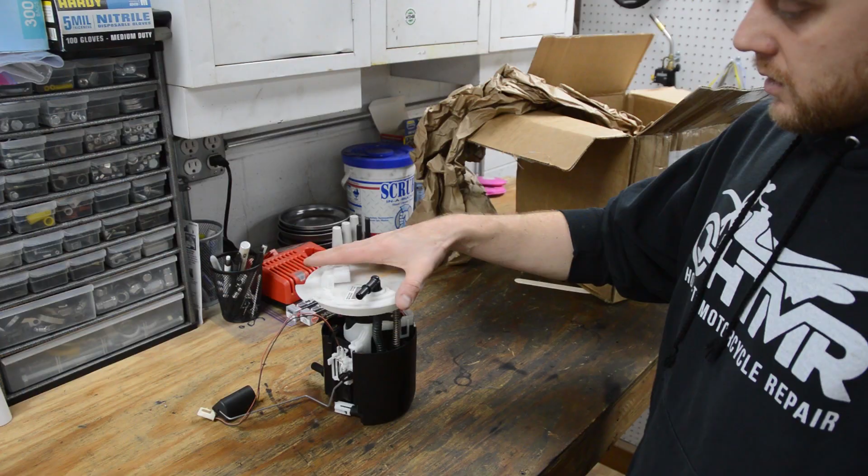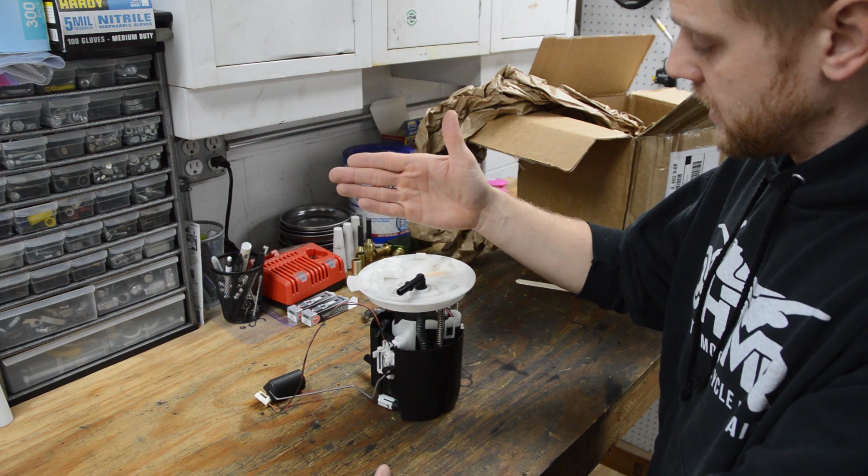Okay, so what I've done is I went to car-part.com. That's car-part. Okay, and on that website a bunch of salvage yards list the parts that they have for sale. So I looked up 2009 and up Cadillac CTS-V with the 6.2 liter and looked under fuel pump, and there was a bunch of salvage yards that were selling these units.

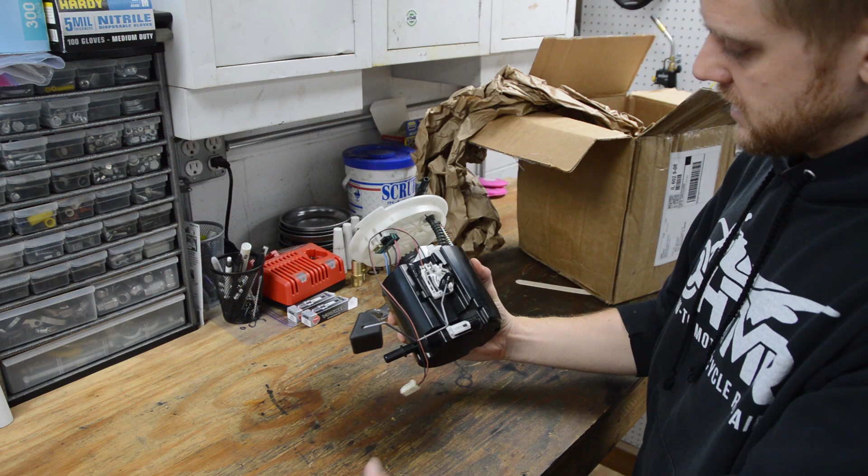I picked this up for $250. It looks like it's in really good shape. This thing isn't cracked or anything. I guess this is a common failure point here. But what this is, there's two pumps in here.

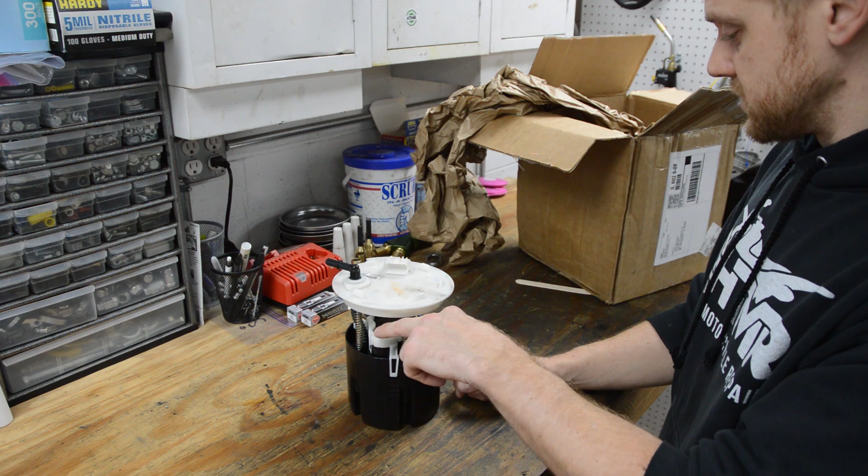Okay, so what I'm going to do is upgrade these pumps. I think VaporWorx is going to do that for me. So install two brand new higher flow pumps and run their PWM controller and all that. So I'm going to ship this off to him, and he's going to rebuild it. Okay, and then we'll have tons of fuel.

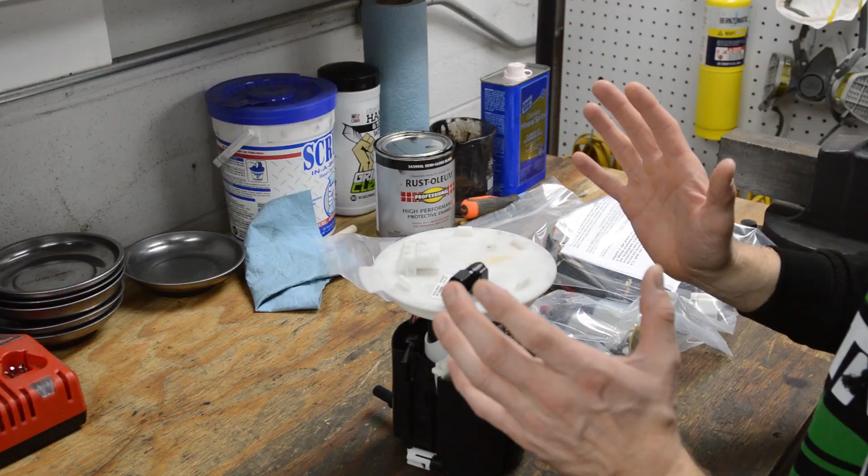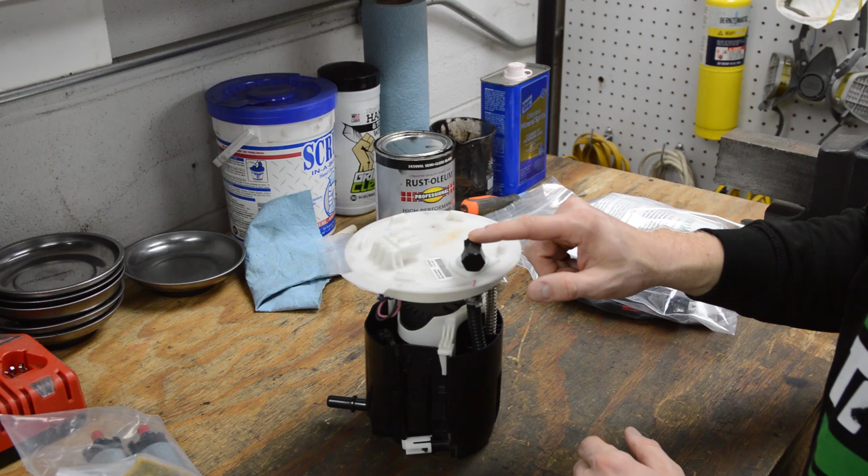So what he did is he took this all apart and upgraded the pumps to the AEM 340 liters per hour pumps. Okay, so these are the old pumps. Changed out the filter. And then also these come stock with a plastic fitting here, which are known to break and leak. So what I had him do is upgrade that to an aluminum bulkhead. So he mills some stuff and whatnot, and this is all aluminum, so it won't crack.

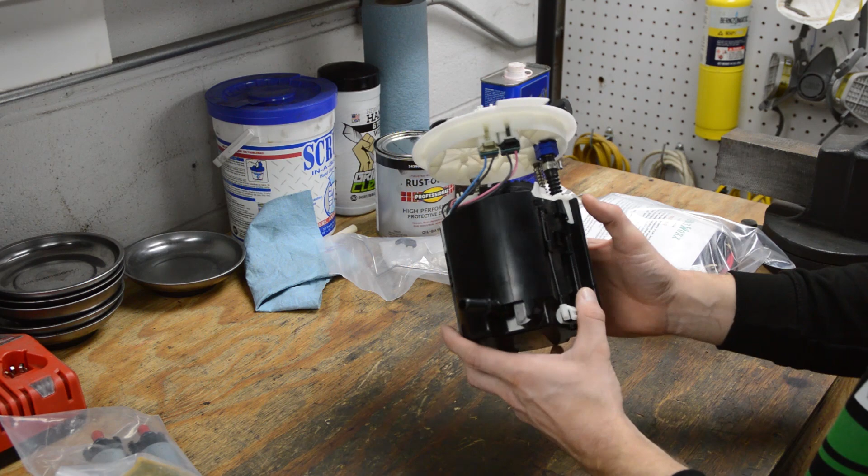And he flow tested it. Okay, so this has upgraded pumps, new filters. It works. This guy is gonna flow a lot of fuel. Okay, and then it still has the hookup for the corner pickups. And also, I removed the float level sensor because I have a different 0 to 90 style.

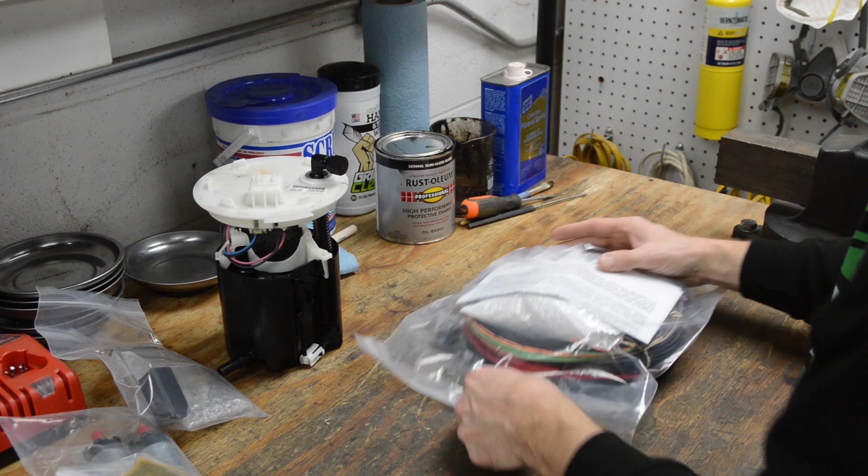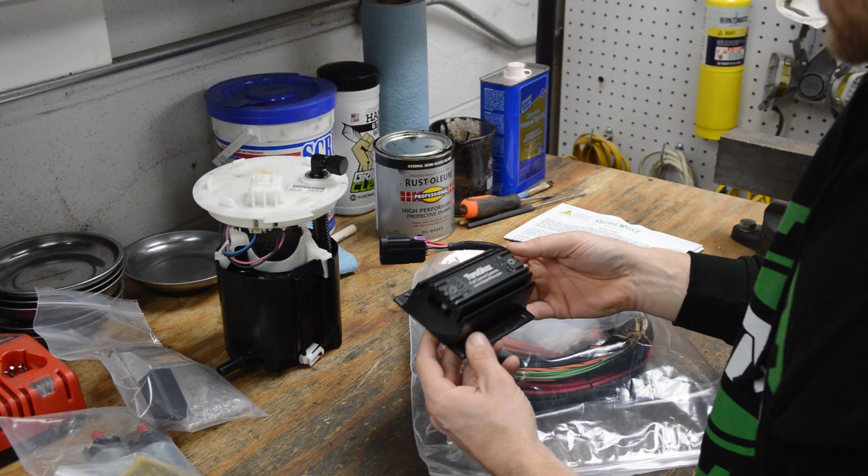Okay, over here is the VaporWorx kit. Let's open this up. Got some instructions to read through. Alright, so let's open this guy up. Alright, so this is the PWM controller. Okay, it's the heavy duty case. And here's all the connections that we need to make. But yeah, this is what's going to control this guy.

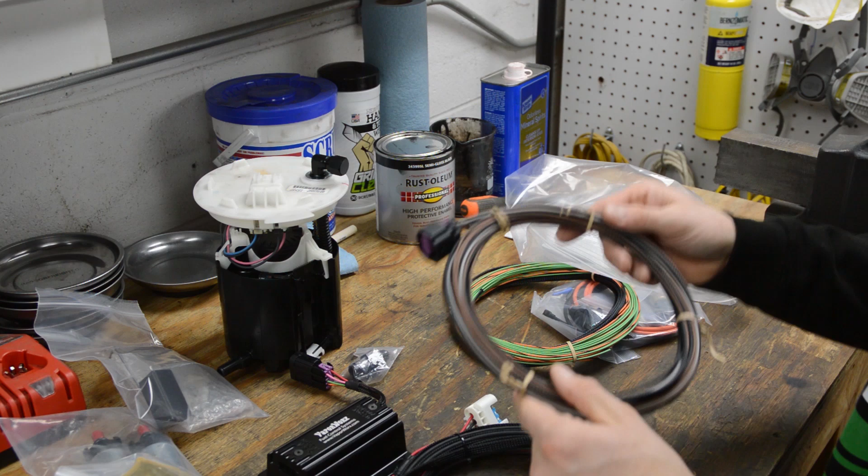Okay, this is a fitting for here. Okay, so this is all the wiring that's needed for this kit. This plugs into, good deal. So we'll go through all this wiring. And this is pretty much everything I need.

Okay, real quick story about how I learned about VaporWorx. I actually met the owner, Carl, back in 2006. I was living in California at the time, and it turns out my boss at the place I worked at went to high school with Carl. And this was right when I acquired my Chevelle. You know, I bought it when I was out there in California. And he's like, hey, Carl is really into cars, and he's got a '69 Camaro, I believe, or is it '67, '68? I don't know.

I will put some pictures. Anyway, he's like, yeah, let's go over there and we'll just talk or whatever. So I met him and we talked cars and whatnot. And here we are 15 years later, and I still keep in contact with him every few years when I have questions on my project. And, you know, I've been wanting to do this build for like 10 years.

So anyway, here it goes. Let me do some doodling and we'll talk about how this VaporWorx system works.

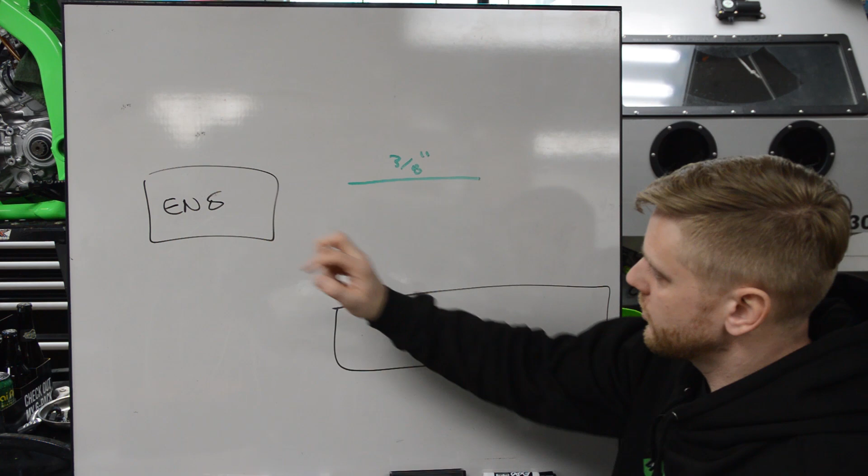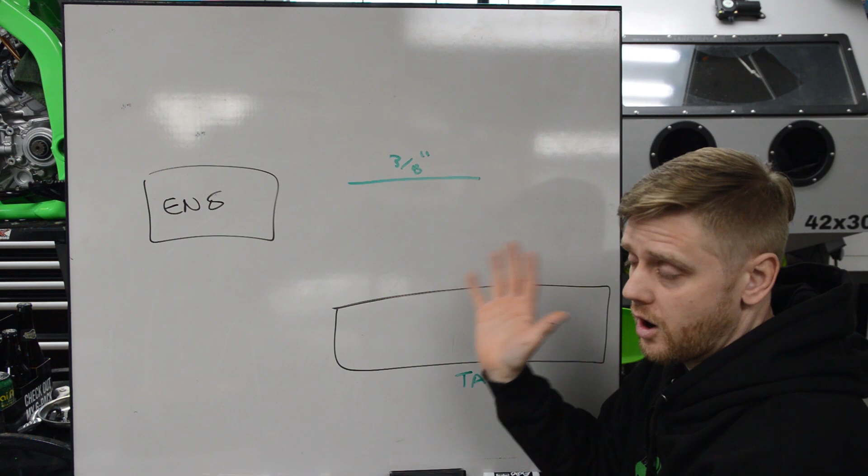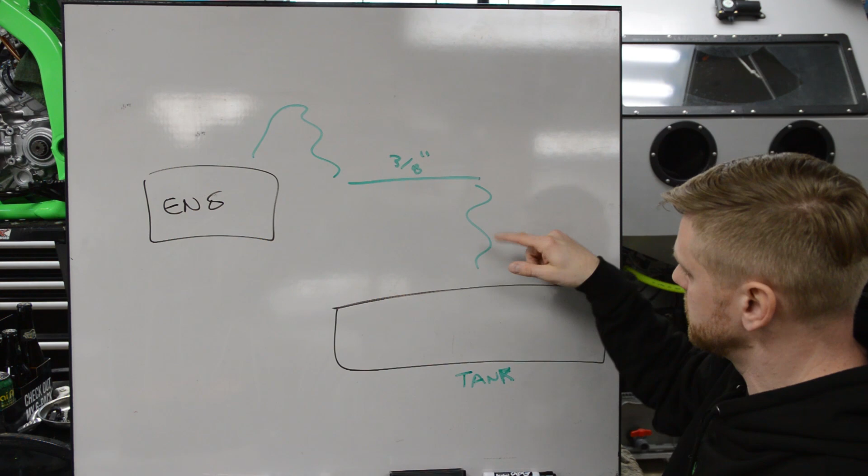Okay, real quick, let me discuss a few things. So we have the tank, we have the engine, and I have a 3/8 hard line, which is stock, 3/8 OD stock line in my frame rail from this car, and that's what I'm going to use. So all I'm going to do is some whips, okay? There are compression fittings that convert tube to AN, so I'm going to do -6 whips. So that takes care of that.

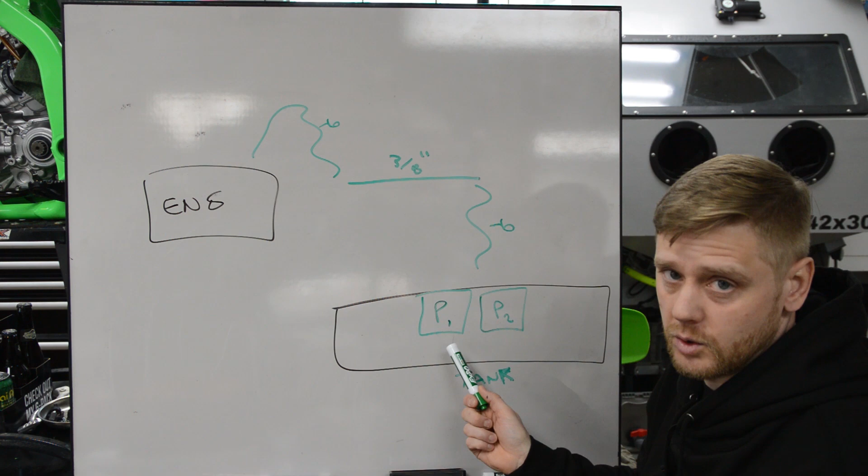That's pretty easy. Now, what most people do is they'll run a huge pump, maybe even 2 pumps, and then the second pump will be activated under boost with a pressure switch, just a Hobbs switch. You hit 1, 2, 3 PSI of boost, and they turn on the second pump to deliver more fuel. That certainly works, but I think the VaporWorks system is more reliable, and I'll show you in a second. Also, when you're doing this, you're running 1 or 2 pumps at full speed, and that generates a lot of heat.

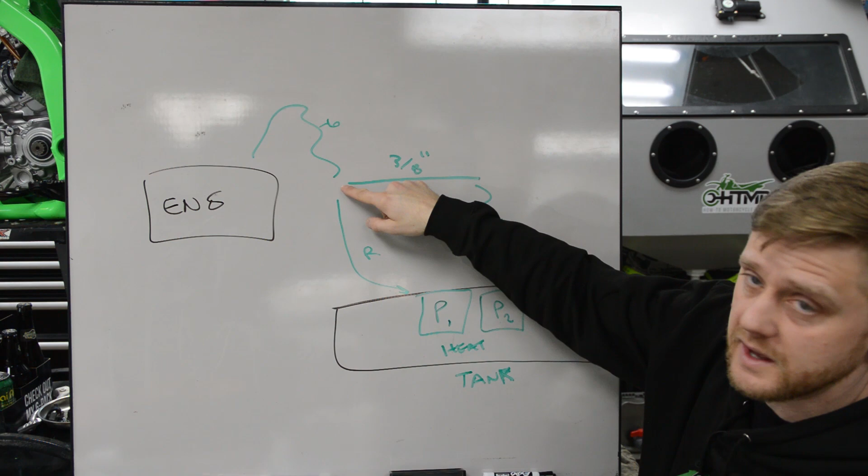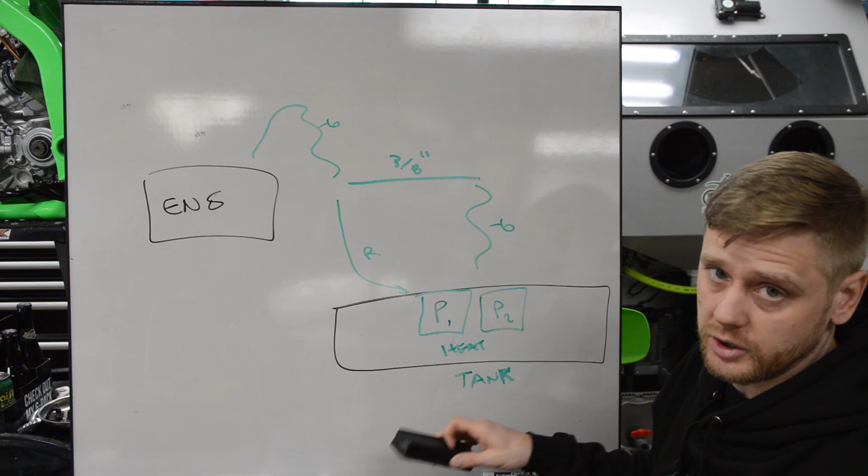And then some people will even do a return line, so what you're doing is feeding fuel all the time all the way up to the engine bay, and whatever fuel is not needed is returned back. So this loop generates heat. Every time you move fuel, you are generating heat. When you're running pumps, you are generating heat. This is going to be a 99.9% street car, and I want to drive it, so that's why we're going to look into the VaporWorks system. So let me go ahead and doodle that.

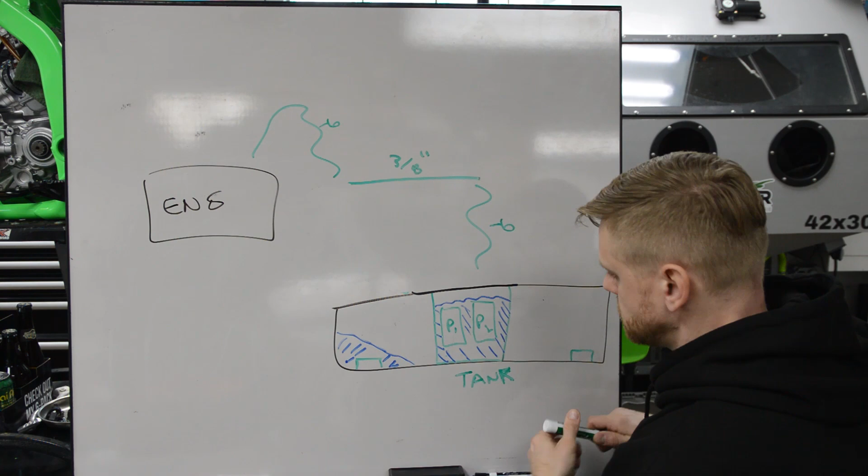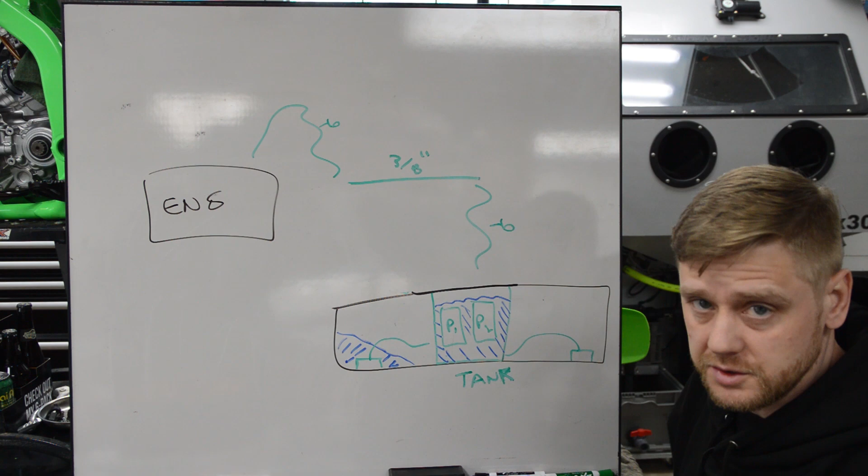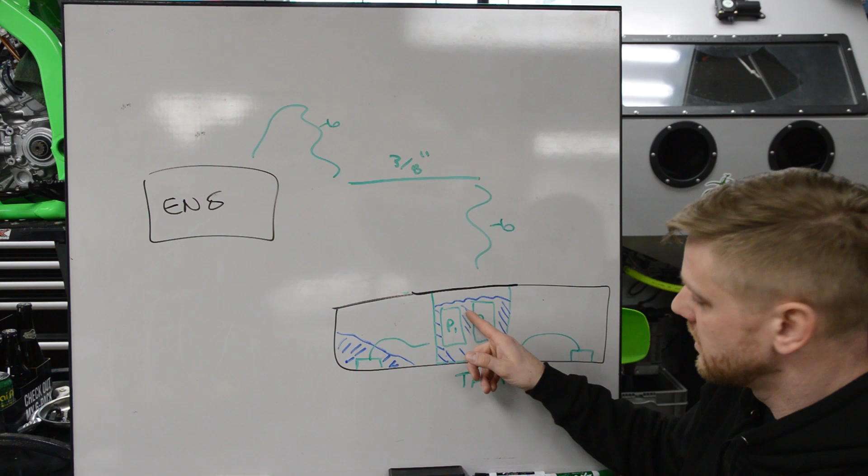Okay, so what I have here is the fuel module, and we discussed what a fuel module does in the RWHP E85 tank video, but basically what it does is it has a venturi and it keeps this bucket full of fuel so you don't get starvation issues when you're cornering. The blue is fuel, and if I'm in a heavy corner or whatever, I also have these corner pickups and it'll continuously feed this bucket. So that's a super reliable setup. All OEM cars do that.

So that's what I wanted, because I do want to autocross this car and stuff like that, and I just want it to be reliable. So we have this, but now we got to solve the problem of running 2 massive pumps, or whatever, 2 big pumps. So here's how the VaporWorks system works.

Okay, so we introduce a PWM controller, which stands for pulse width modulation. And what that is doing is basically hitting this with voltage on and off, and you get an average voltage. So basically, how does this guy know when to turn the pumps on or off?

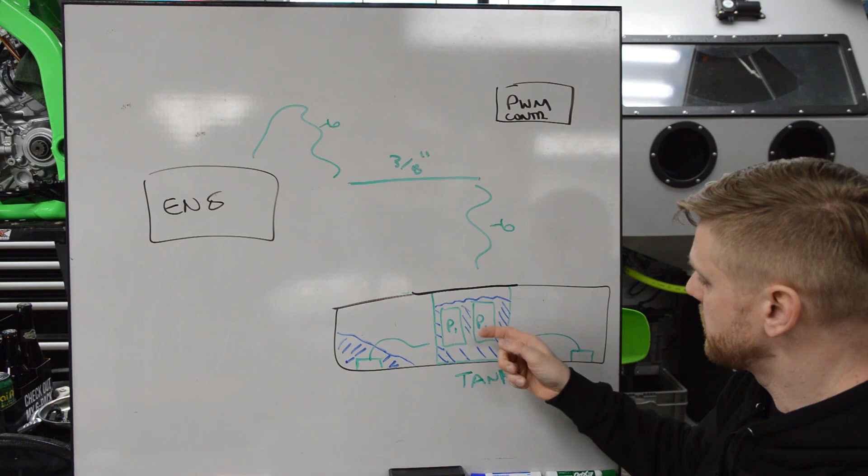Well, there is a sensor that we plug in here that monitors fuel pressure, and we set the pressure, let's say for 43 PSI. That is set in here by turning a screw. This guy gives feedback to the controller. When the pressure drops, this starts adding more voltage to the pumps. So at idle, you could be at like 4 volts or whatever, I'm just making that number up, and it's just delivering enough fuel for idle, no more, no less.

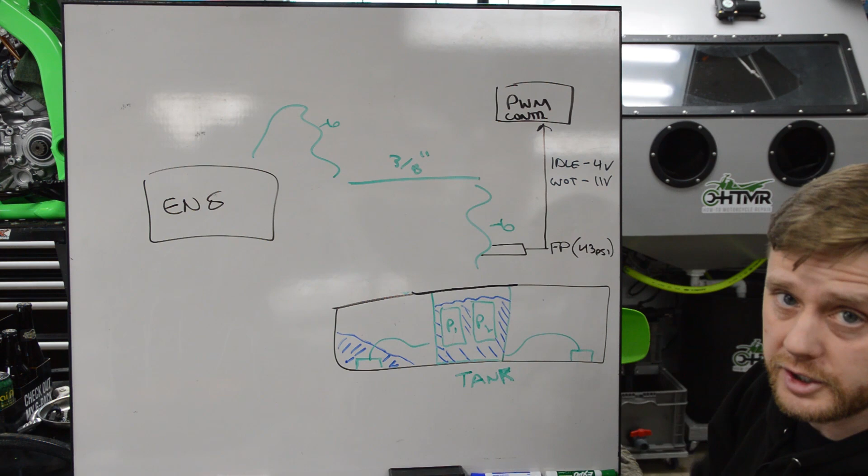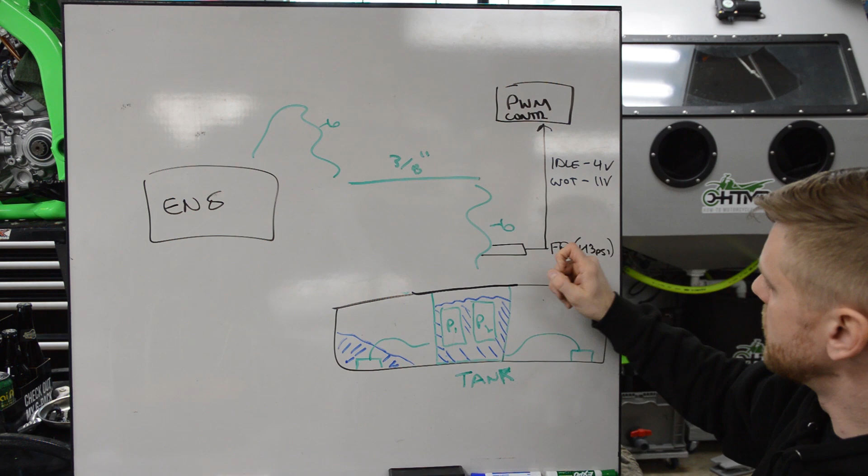And at wide open throttle, let's say, you know, 11 volts or whatever, it gives it a lot more fuel and it'll push more fuel. Also with this system, it's single feed, no return, so that simplifies the plumbing. You don't need a pressure regulator because this is keeping it constant and it's adjustable. So it has a built-in pressure regulator, basically.

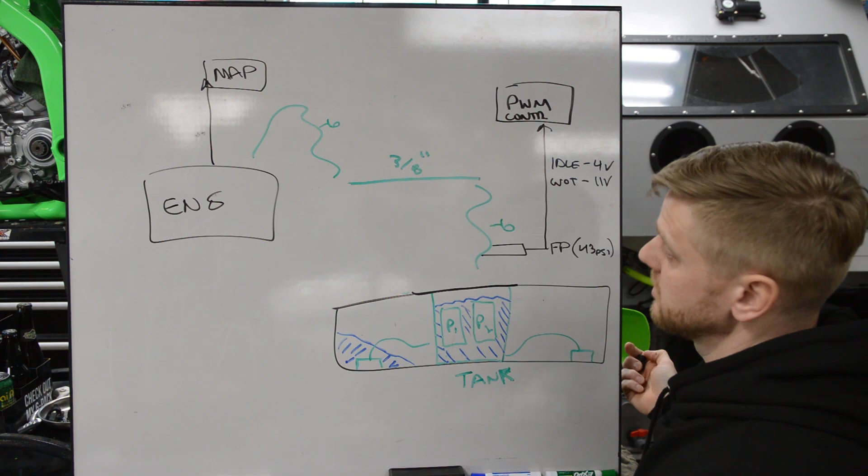So that's awesome. Now, I got the PressureWorks system, and what that does, it takes your map reading, which is pressure, and it feeds it back to here. And it has a 1-to-1 rising rate. So at 10 pounds of boost, it's going to be at 53 psi. So it's going to ramp up the pressure reading off the map sensor of the engine. So that's pretty awesome.

Also, let's say I need more power, let's say I run out of capability with this pump, well, you can introduce a booster pump.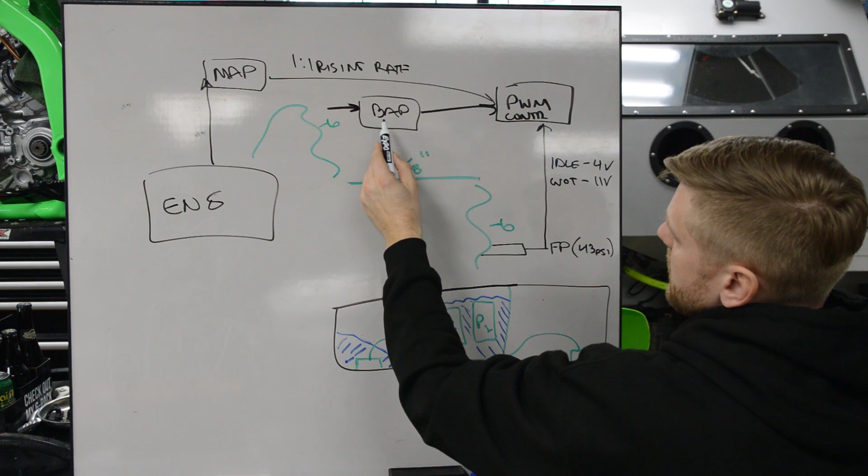The company he recommends is JSM. Basically, what that does is it goes like this, and there's another wire that connects here. He sets it up such that this circuit knows

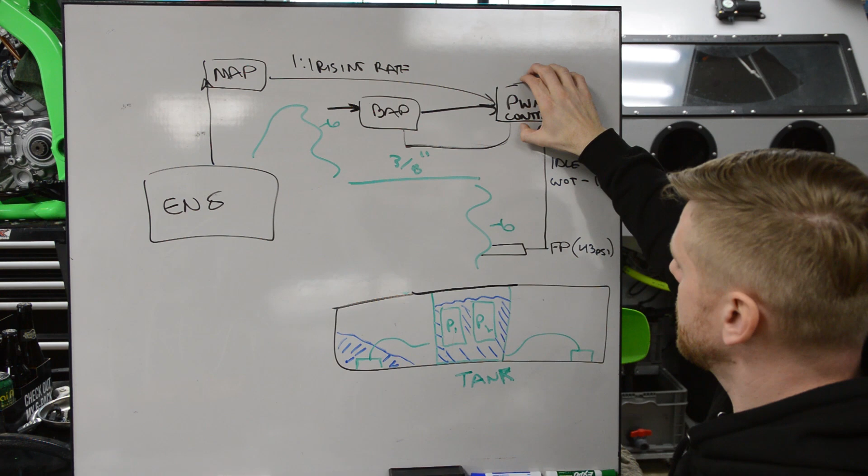when you need more fuel based off the duty cycle of this, and it ramps up the voltage past 12 or 14 volts. It adds another volt or two, and you get a lot more capacity or fuel pumped out of these pumps.

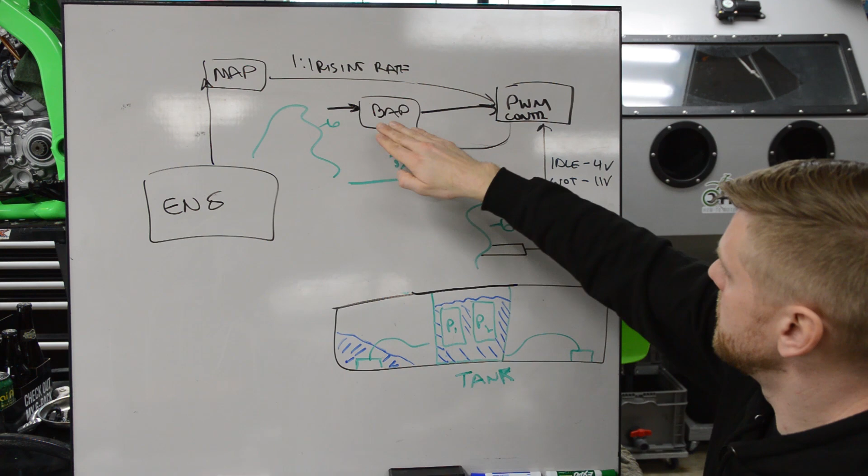I won't need this, but if I do, that's an option, and I bought it just in case. So the voltage booster pumps more voltage to this, but this guy decides when to boost it, because you don't want it on full voltage or boosted voltage all the time, because then the pumps get hot and they're running.

So that's it, this is pretty simple. Some of this stuff does cost a lot of money, right? But remember, you don't need a fuel pressure regulator, you don't need a return line, you don't need any filters, because the filters are down here. The connections are simple because they're just whips. It's going to be what I think a super reliable system, expandable, and I'll be covered for all my needs. I went overkill on this, and that's just because why not?

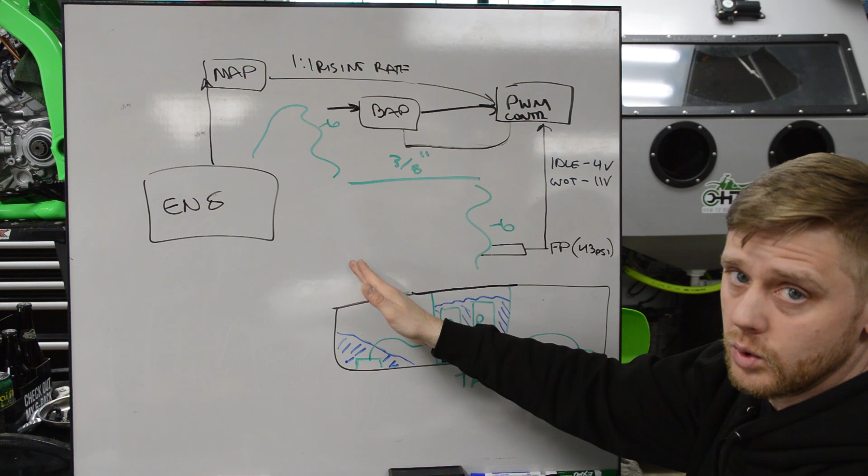It seemed like the LS3 module obviously wouldn't do it. The ZL1 I probably would have had to buy new. So I found this one used, upgraded it, and it's ready to go.

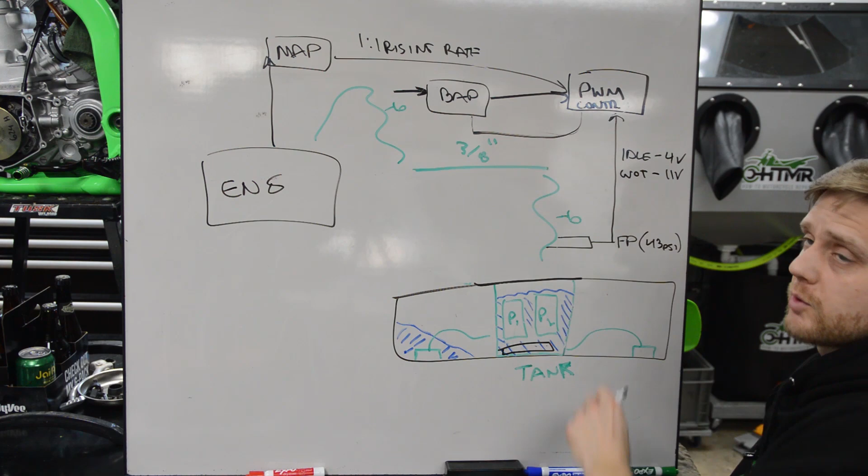After asking Carl, the fuel pump module that I have with the AEM pumps that he installed through his PWM controller on E85, I should be able to do 700 rear wheel horsepower with E85. He sold a bunch of these to people in Australia, and they were getting these results, all through a -6 line.

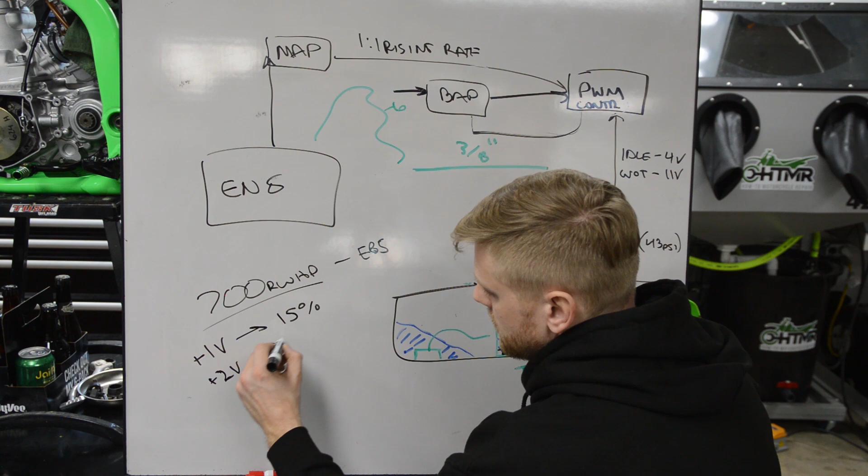Now, if I want to go more, I can do the booster pump. I'm not going to do that, I feel I don't need it, but I just wanted an option. It's always nice to have room to grow, right? So he said, if you have a booster pump and you add 1 more volt, you're going to get 15% more volume. At plus 2 volts, you're going to get 30% more pump output.

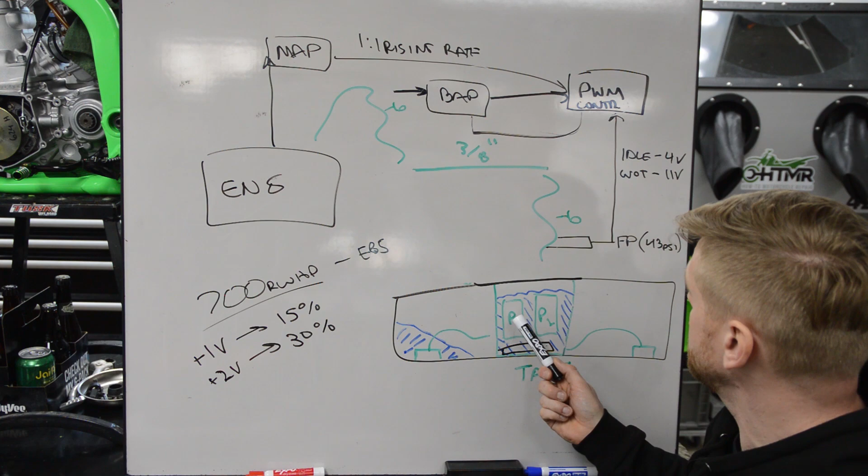So you can grow to 1,000 horsepower with this setup. Now there might be some other restrictions, and maybe my system isn't capable of that, but that's a lot, man, with great reliability, and it's on-demand fueling. That's kind of what I've been looking at for years, and that's what I really like about it. Yeah, I think this is going to work great.

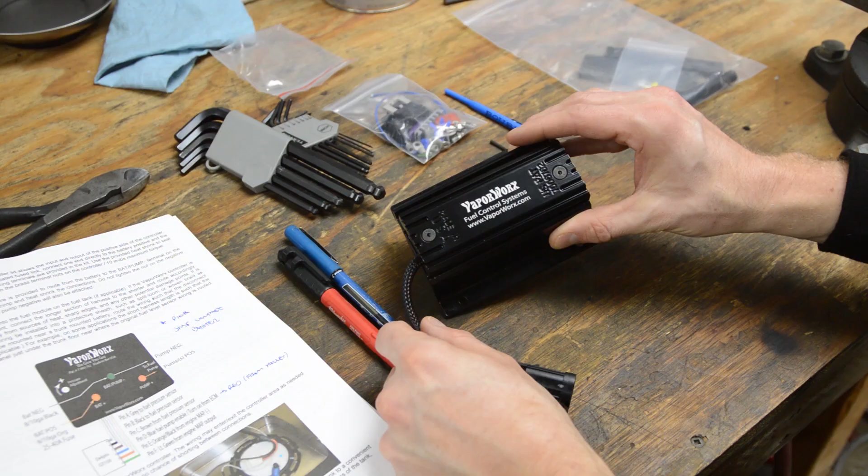Here's the VaporWorx PWM Controller. This lid comes off and exposes all the hookups. We're going to have this mounted - you can mount it anywhere, but it says close to the battery, and you hook it up to the battery. I'll put this under the hood somewhere, and I'm going to run a wire from the battery to here, positive, and then negative.

And then here is the pump, positive output. The pump negative goes - so this is the negative, sorry. Battery and pump negative go here, battery here, pump here. So that controls the voltage.

This here is the input from, there's 3 wires for the fuel pressure sensor. There's 2 to the map, and there's one for turn on from ECM. And then I have an additional wire which would be from a voltage booster in case I ever want more. I'm not going to do that now, but later down the road, if I need more, I have the opportunity to boost the voltage to the pump and get more flow.

So it comes in, this is their heavy duty case, heavy duty aluminum, I guess for heat dissipation or something like that. But in any case, he had the heavy duty one, and that's the one I went with.

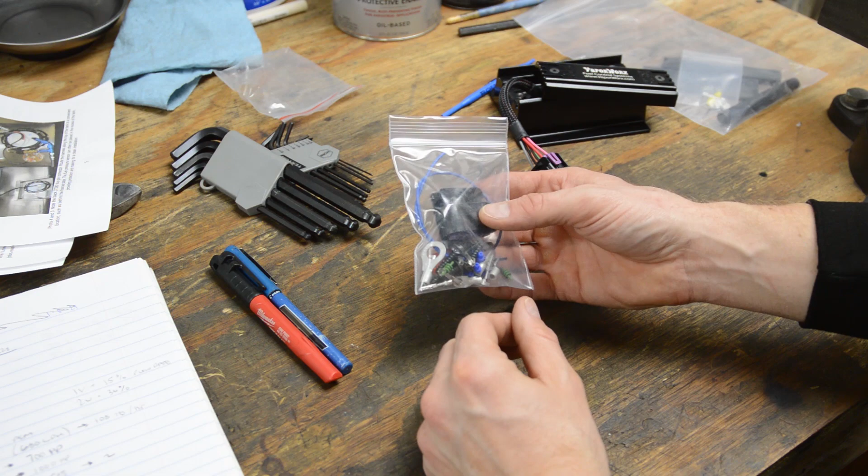It comes with connectors and pins and fuses and all the good stuff to make all your connections. Because if you look here, this is for the fuel pressure. I labeled this - these wires are terminated for the fuel pump module, but you got to run this all the way to this guy, so you will need to terminate it. So that's this bundle of wires here. We have the map, so I'm going to have to split the map signal and then run it to here.

And then here is the battery wire, and it has a fuse. And then here is the ground wire to the battery. And then here is the wiring that runs to the pump module.

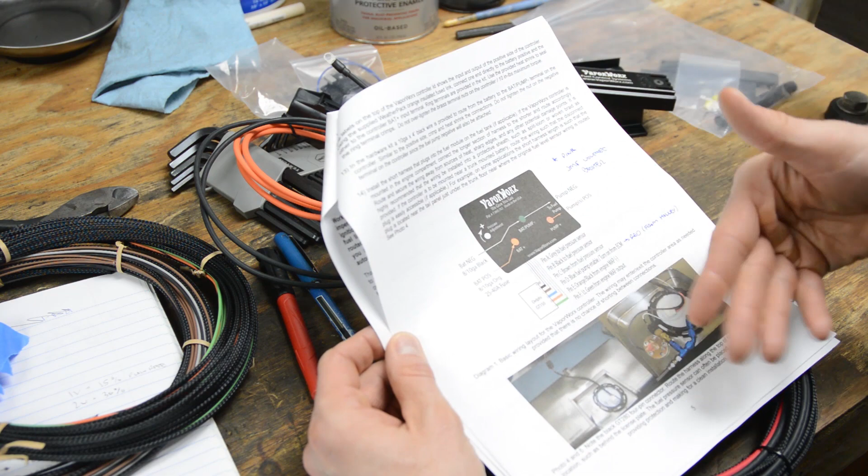It comes with nice instructions on how to do it all. So I just read through all this, and it's pretty self-explanatory. Let's take a look at the old pumps just for the hell of it.

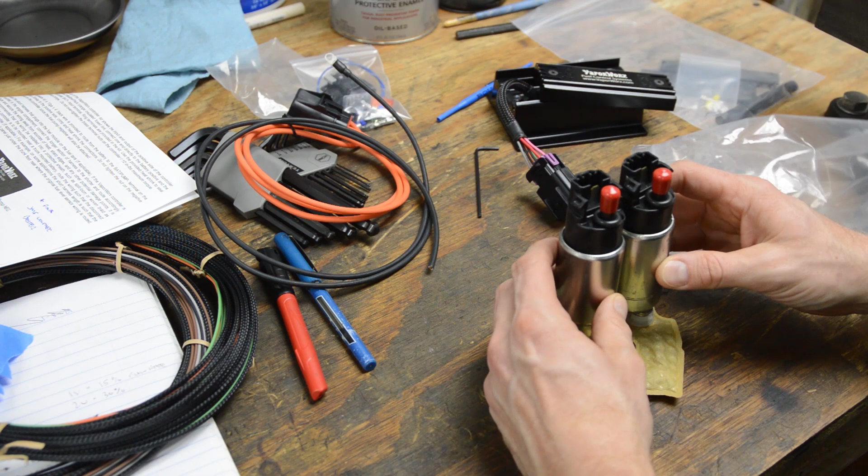So these were the stock CTSV pumps, Bosch pumps, and the filter and whatnot that's attached. So these were replaced with AEM pumps.

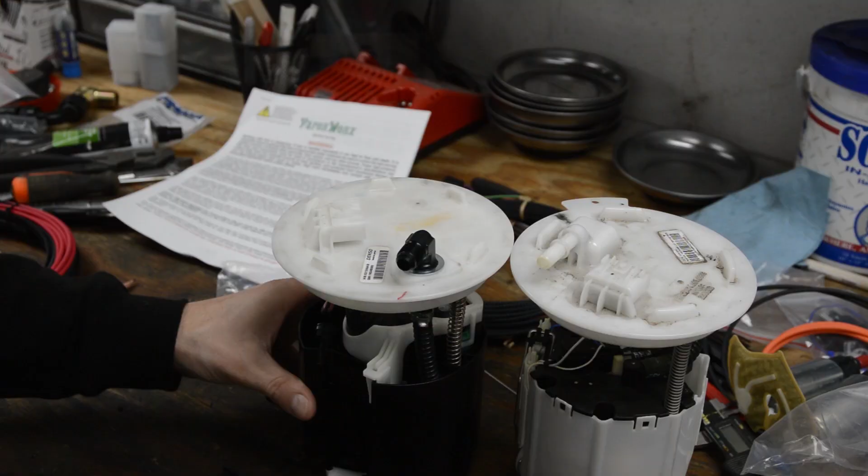But real quick, let me also show you this part that comes in the VaporWorx kit. This is a fitting that has an 1/8 inch NPT port. I believe this is 1/8 inch NPT, or it sure looks like it. So there's a sensor and there's an adapter.

So this guy gets screwed on right here, and then you put the sensor right in here. So it's going to go something like that or whatever. This is a cap, and that's it.

Now I'm going to go to my hose whip. So I have some fittings and some hose. We'll see how it is when I put the tank in and see how it all looks. But that's it, it's pretty simple and clean. I only got one line to worry about, and now I got this all upgraded, so I'm not going to have any leaks.

Also, Carl mentioned that I can cut off this tab. This is simply to locate and clock it for OEM applications or whatnot. So what I did, let's see here, I just trimmed that tab right off. That'll allow me to clock this however I want, because I think it's at a funky angle normally. So maybe I want this guy straight back, and then I'll just whip it to my hard line.

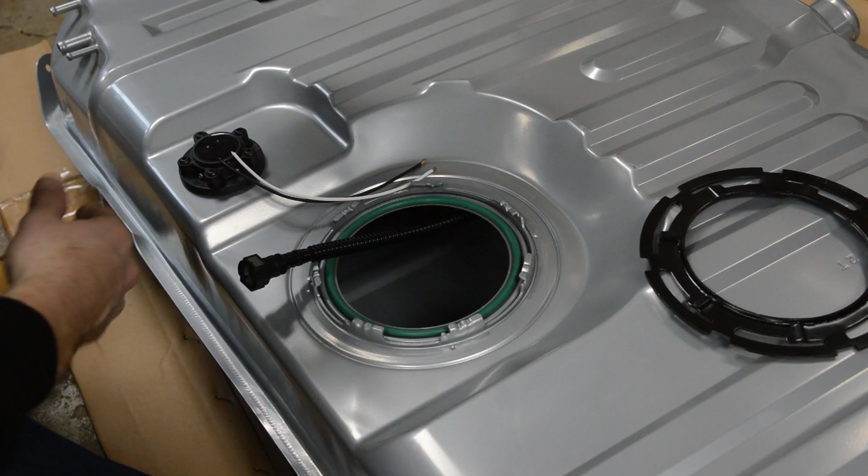All right, so let's go over how this fuel module drops in. First of all, this connection here is for the LS3 style, and it won't fit on the Cadillac style. So there's an adapter that I need to buy. Actually, I already bought it, but it's not coming in, so I didn't want to delay this video. VaporWorx has this fitting that connects from here to here.

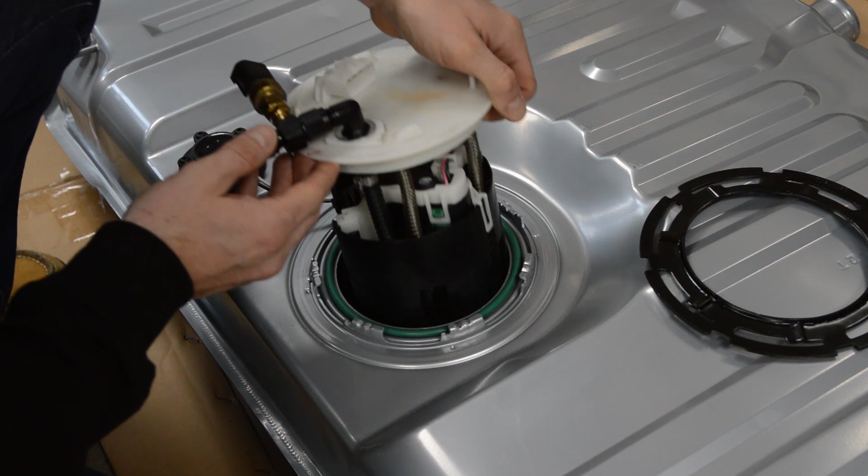So these are the corner pickups, it sucks fuel from either corner, as I discussed in the previous video. But let's just pretend I hook that up. This guy drops right in. There's an O-ring, and since I cut off that tab, I can clock this guy to suit the hard line in my car. So it drops in like that.

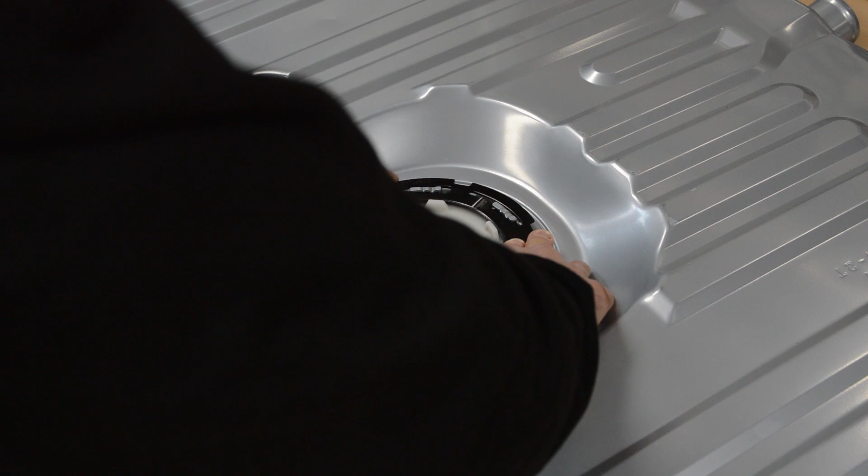You got this cam ring, so it goes like that. I'll have to put some pliers on here and twist this into the detent. So it's got to go about another 5 or 10 degrees. But I can clock this however I want.

The sensor is going to hide nicely here. We're going to have wires here and here, with all these hookups, and it's going to go through the trunk. And that's it, so it's pretty simple, pretty clean.

Love it. All right, so let's take a look at the VaporWorx site, and that's VaporWorx with an X, okay? And their motto is, we give you gas. So what I really want to show you is this resource tab.

So it kind of walks you through how everything works. And look at all this stuff here. There's just sections, and it walks you through fuel delivery 101 basics, fuel pumps, regulators, filters, fuel modules, how do PWMs work, controllers, and the corner pickups, and fuel transfer lines and everything like that. So, I mean, I read through all this many times, and it really does a good job of explaining why.

And the benefits of going with a fuel module and PWM and all that. That's how a lot of the OEMs do it, and in this case, you still can get a lot of power, a lot of fuel flow out of a system like this, and retain all the OEM stuff, which has its advantages. So definitely read through all this stuff, it's pretty interesting, and that's what this company's all about. And I'm happy to use these products, I think they're going to work great. Okay, so that's VaporWorx with an X.